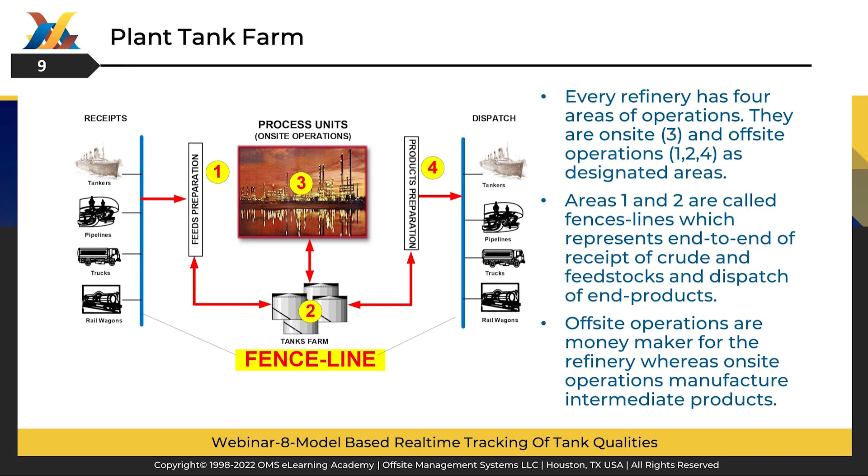The off-site areas are particularly significant commercially. They are the refinery's profit generators, managing the saleable end products. These off-site operations sharply contrast with the on-site processes, which focus on transforming crude into intermediate products. Understanding the dynamics of these areas helps us appreciate the refinery's workflow and the importance of real-time tracking of tank qualities, which ensures efficiency and profitability in this complex operation. Quality analysis is pivotal in refinery operations and can be conducted through various modes and methods.

Three primary methods are employed to measure or estimate product qualities within a refinery. Firstly, we have laboratory sampling, which remains the cornerstone of quality analysis. Lab analyses serve as a crucial backup and provide certification for all sample points, ensuring reliability in the measurement process.

Secondly, there's online measurement. Although not all streams are equipped with online analyzers, they provide a continuous and real-time assessment of product quality for those who are. Lastly, we resort to model-based predictions when online measurement is not available. This method uses computational models or inferential techniques to estimate the quality of the streams.

The slide clearly shows which methods are currently practiced and which are optionally practiced across different refinery areas, such as the fence line, the tank farm, and the process units. These methods form a comprehensive approach to managing quality, each with its role in ensuring the final products meet the set standards and specifications. Understanding and implementing these methods efficiently is critical to the success of any refinery operation.

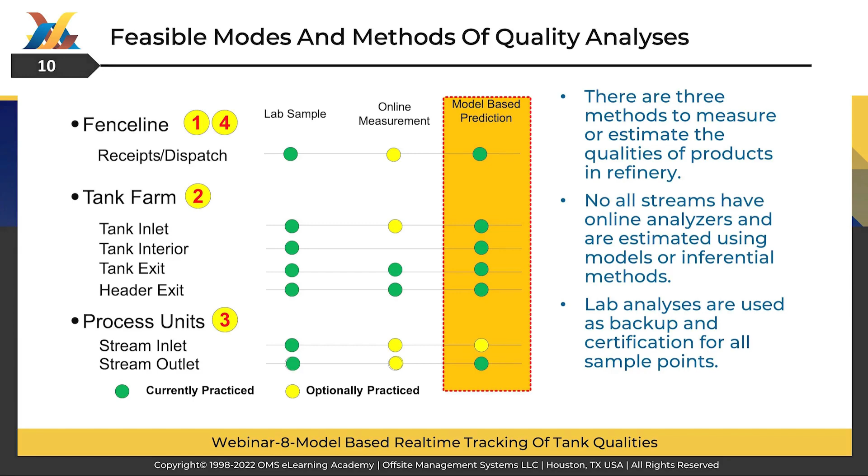In today's discussion on refinery operations, we highlight three crucial tank information types required for optimal management and compliance: inventory, quality, and fugitive emission. Modern refineries leverage automated tank gauging systems for inventory to keep a real-time tab on their liquid assets. This technology is crucial in monitoring the transfer of materials between plants, managing crude and product blending, and handling custody transfers with precision.

Regarding quality, we are looking at a robust certification process for product qualities before dispatch, thorough checks of feedstocks, and continuous control of process stream quality. This is further reinforced by comparing the readings from online analyzers to ensure consistency and accuracy.

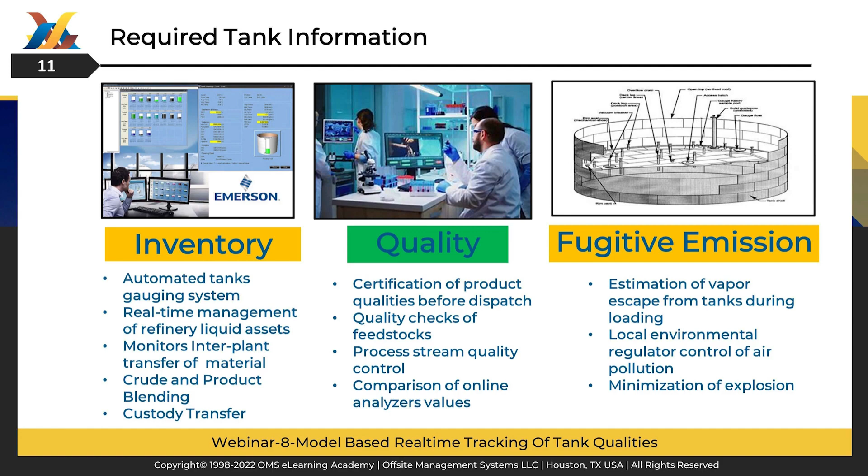Lastly, we focus on fugitive emissions, an environmental and safety concern. Refineries can better adhere to local environmental regulations controlling air pollution and significantly minimize the risk of explosions by estimating vapors that escape from tanks during loading. Together, these components of tank information form a trifecta of refinery efficiency and safety, ensuring that operations meet industry standards and contribute to sustainable and responsible production.

Now, let us dive into the sophisticated methodologies deployed for analyzing and estimating tank qualities within the refinery sector. First up, we have process analyzers. These are specialized devices, ranging from single-purpose analyzers for one specific analysis to integrated systems capable of multiple analyses, like near-infrared, NIR, or nuclear magnetic resonance, NMR, technologies. Some refineries utilize a combination of discrete and integrated analyzers or advanced multiplex systems that can manage multiple components and analyses simultaneously.

Next, we look at lab analysis. This traditional and rigorous approach involves a structured sampling and analysis schedule, with process streams sampled more frequently than tanks. To ensure the accuracy of online analyzers, samples are also taken to the lab. Furthermore, refineries often participate in round-robin tests to certify their lab values, maintaining the highest quality verification standards.

Lastly, model prediction plays a vital role. This prediction approach harnesses blend and inferential models' power to estimate tank and process stream qualities. It necessitates using multiplexed analyzers at tank inlets, allowing for a real-time model of tank qualities marrying historical data with new inputs to predict quality metrics accurately.

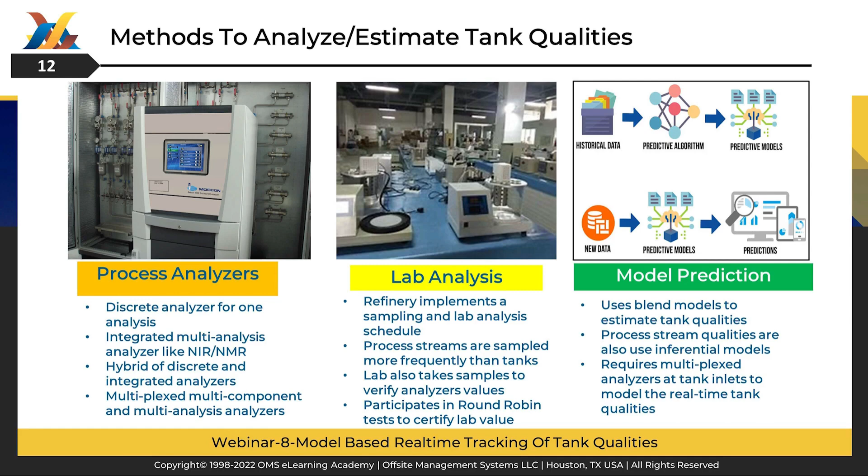These three methods represent the cutting edge in ensuring that the quality of the products stored in tanks is consistently monitored and maintained, reflecting the refinery's commitment to precision, safety, and quality control.

In the meticulous field of quality assurance within refineries, we employ a multi-tiered system of checks and balances to mitigate errors and biases. Starting with process analyzers, these sophisticated equipment pieces are not immune to analyzer error bias, necessitating regular calibration and cross-verification to ensure precision.

Lab analysis stands as the bedrock of quality verification. Despite its rigor, it, too, faces the possibility of human error. To counter this, we have stringent cross-checks and protocols, including participation in round-robin testing, a system-wide comparison exercise to ensure consistency and accuracy among various laboratories.

Model prediction, utilizing historical and predictive data, also brings in its challenges with model error bias. Continuous refinement of models with new data is essential to keep this in check. These methods converge to form a robust network of error checking, with each method validating the others, ensuring that the data on tank qualities is dependable and validated across multiple platforms, thus maintaining the highest quality control standards.

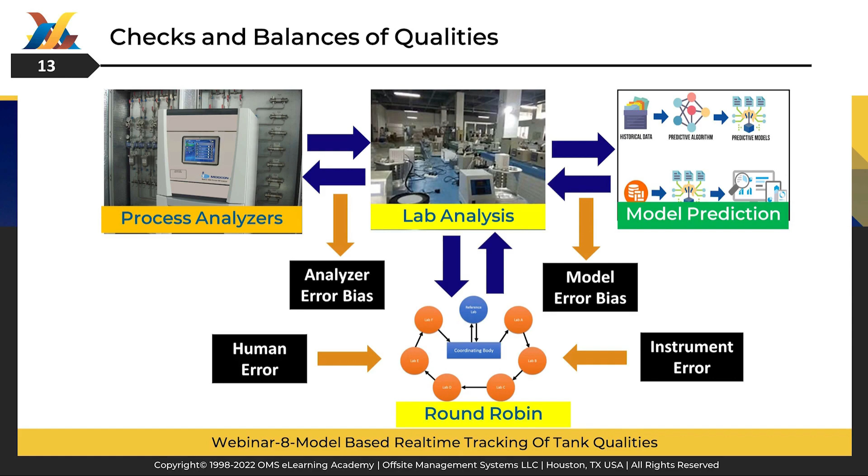Let us delve into Method 1 for tracking tank qualities, crucial to maintaining high standards in refinery operations. First off, we have the online analyzers. These are critical tools positioned at strategic points such as the tank inlet or outlet, monitoring the quality of the streams in real time. This continuous analysis allows for immediate adjustments and ensures consistent product standards.

The second layer of quality control comes from tank sample and lab analysis. Samples are regularly extracted from the tanks and analyzed in the lab to verify the online analyzer's readings. This dual approach reinforces the accuracy of the data we rely on.

Finally, we integrate model-based predictive calculations. These sophisticated algorithms consider historical data, current measurements, and predictive analytics to estimate future tank qualities. This provides foresight and enables initiative-taking decision-making to maintain quality standards.

By combining these three methods, we establish a robust, multifaceted approach to quality assurance that is both responsive and predictive, ensuring that our products meet the highest quality benchmarks before they reach the market.

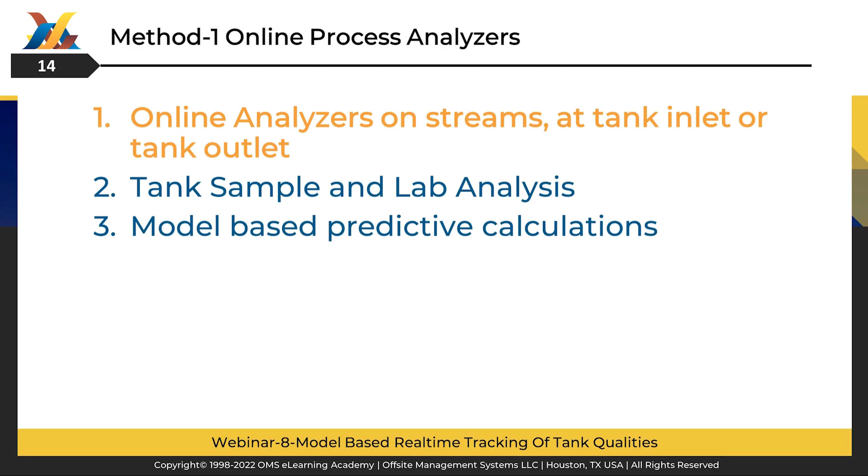In the high-stakes process control and quality assurance environment, online process analyzers are the unsung heroes. Here is how they fit into the workflow. Firstly, we place these analyzers right on the process unit output streams. Their job: to measure the stream qualities meticulously, ensuring each product meets our stringent standards before it moves down the line.

Secondly, we can deploy additional analyzers at the tank inlet. This step is not always used, but when it is, it provides an extra layer of quality control by measuring the qualities of the materials right as they enter the tank, keeping a vigilant eye on the process downstream from the process units.

And thirdly, these analyzers also play a critical role in the tank outlet streams. They are our final checkpoint, ensuring that the qualities of the materials as they leave the tank are up to par. With these online process analyzers at strategic points, we are not just tracking quality, we are defining it in real time, ensuring every product that leaves our facility does so with a stamp of excellence.

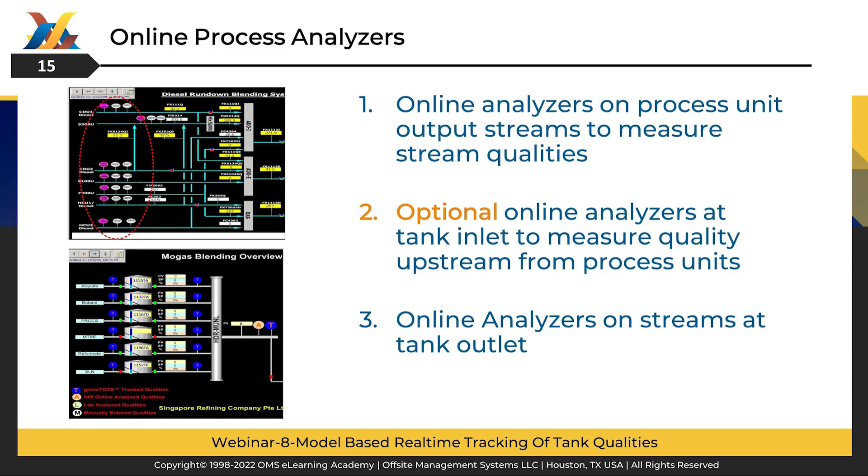In our ongoing discussion on refining operations, let us focus on the role of online and lab analysis in monitoring the rundowns from process units. Online analyzers are installed at process units to provide immediate insight into the qualities of the rundown streams. However, it is critical to understand that these readings reflect the state of the product at that moment and location and not necessarily the quality at the destination header or the storage tank.

These analyzers also cannot cover all bases. They do not analyze every quality aspect of a stream, so lab analysis comes into play to cover the full spectrum of required quality checks. Another interesting point to consider: these online analyzers are not always exclusive to a single stream. They may serve multiple streams, thus providing a shared service that is both efficient and practical.

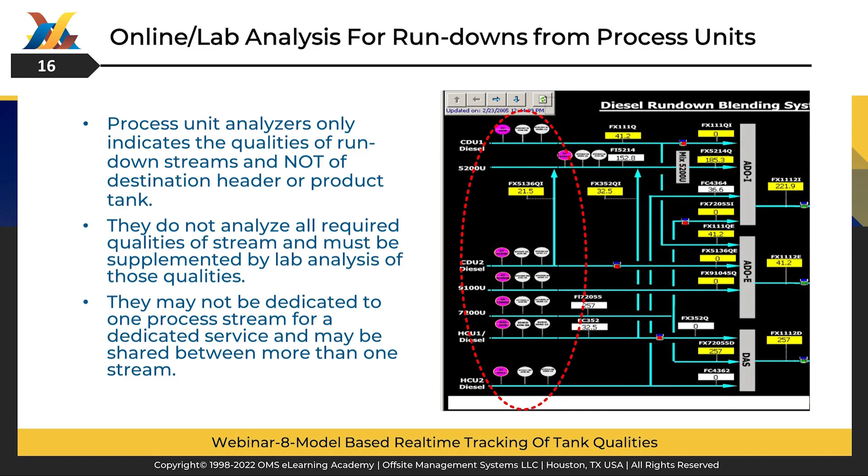These online and lab analyses provide a comprehensive picture of product quality as it moves from the process units to the destination, ensuring we maintain the highest quality standards at every stage.

The world of refinery operations heavily relies on the precision of online blending analyzers. Positioned at the critical junctures where components leave their tanks or at the blending header, these analyzers are the gatekeepers of quality during the blending process. They can be specialized for tasks or multifunctional, providing a dynamic assessment of various product streams.

These analyzers spring to life when the blending process is active. During these periods, they meticulously measure the qualities of the mix. Without active blending, they remain dormant, conserving their capabilities for when the process recommences. However, it is essential to note that even these advanced tools do not extend their reach to measuring the final product qualities in the tank.

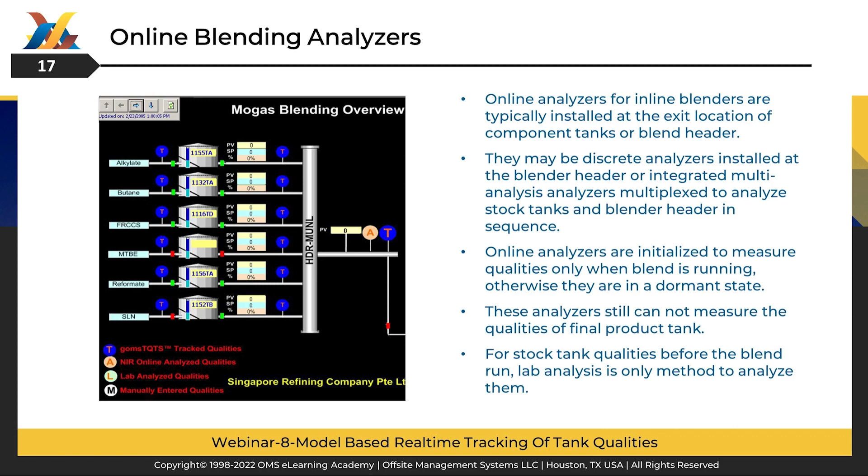For that, and for assessing tank qualities before the blending starts, lab analysis remains the cornerstone, providing the necessary depth and detail to ensure product integrity. Online blending analyzers offer a snapshot of the blending operation, part of a larger picture that ensures the quality of the product through a combination of sophisticated online tools and thorough laboratory work.

In our exploration of gasoline blending, we turn to the critical role of conventional online analyzers. These systems are not one-size-fits-all. Different analyzers are used for different quality aspects. For instance, near-infrared (NIR) analyzers handle a variety of quality measures but are not used for sulfur content, which requires a specific type of analyzer.

These online analyzers operate in a multiplexed fashion. What does that mean? It means they can cycle through multiple streams, assessing each to give a comprehensive overview of the qualities within the blending process.

This setup feeds into an advanced blend control and optimization system, which relies on the analyzed qualities to make real-time predictions and adjustments, ensuring the final blended product meets the exact specifications required. This intricate dance of technology is vital to how modern refineries maintain consistent product quality at every stage.

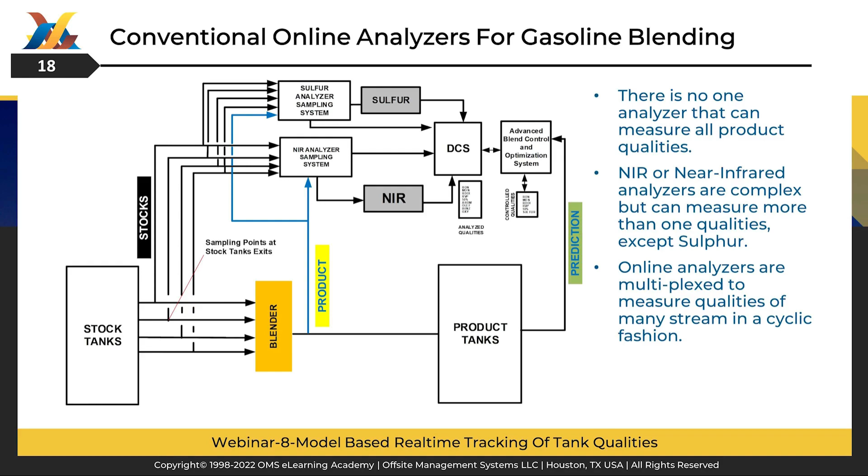This slide presents the varied features of online process analyzers in refinery operations. Online process analyzers are the technological eyes within a refinery stationed at the exit points of process unit streams. This strategic placement allows them to capture real-time data essential to control unit operations.

They are not just limited to monitoring the egress of streams but can also be found at the ingress points, such as the inlet to a storage tank, providing a versatile range of monitoring points. In the specific context of gasoline inline blending, these analyzers are indispensable. They are placed at the exits of tanks where they scrutinize the quality of products at this crucial juncture of production. Further versatility is noted in their installation at blend header inlets, which allows for a preemptive assessment of the qualities that will eventually define the final product.

The design of these analyzers varies. They can be either discrete, handling a single quality measurement for one stream, or integrated, capable of analyzing multiple qualities in one go. Additionally, some are multiplexed, meaning they can alternate their attention between different streams, enhancing their utility and efficiency within the plant operations. Through these features, online process analyzers provide a comprehensive and dynamic picture of product qualities across the refinery, which is crucial for ensuring top-notch product standards.

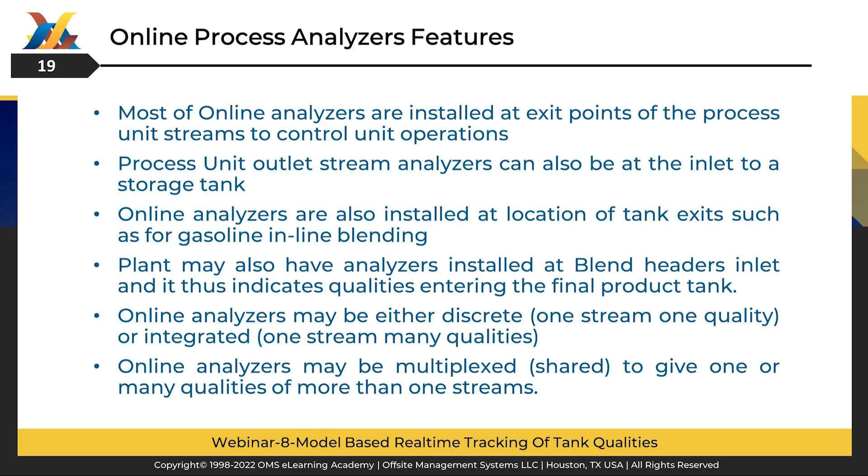This slide outlines a lab schedule that is instrumental for on-site refinery operations. In a laboratory setting within the refinery, every product and process stream from naphtha to visbreaker diesel has a dedicated schedule for sampling and analysis. This meticulous planning allows for precisely tracking the number of analyses required daily, weekly, and annually for each product. Such a detailed schedule is more than a mere timetable. It is a strategic framework designed to forecast laboratory operations workload and financial impact on the refinery.

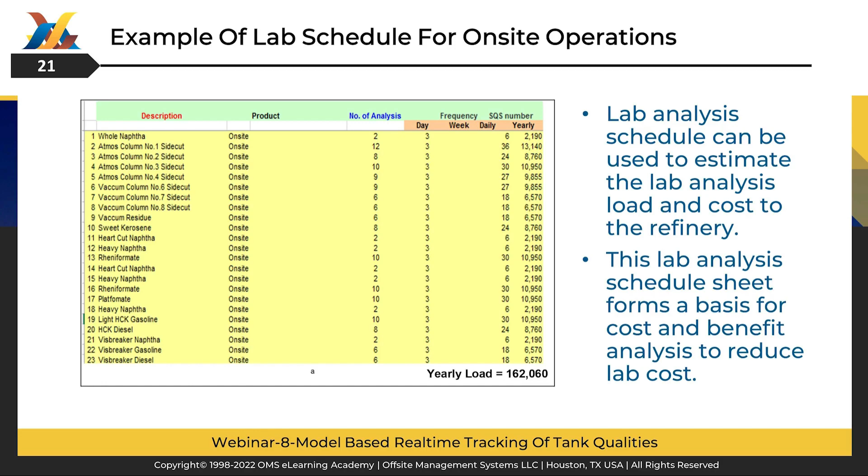The cost of lab analysis is not arbitrary. It is determined by a precise formula: the number of source points sampled, the number of qualities analyzed per sample, and the number of samples taken per period. This analysis is neatly summed up as SSQ, a multiplying factor of these three variables. When considering the SSQ value, you look at the required lab work volume. A higher SSQ signifies a more significant laboratory workload and thus, a higher expense to the plant.

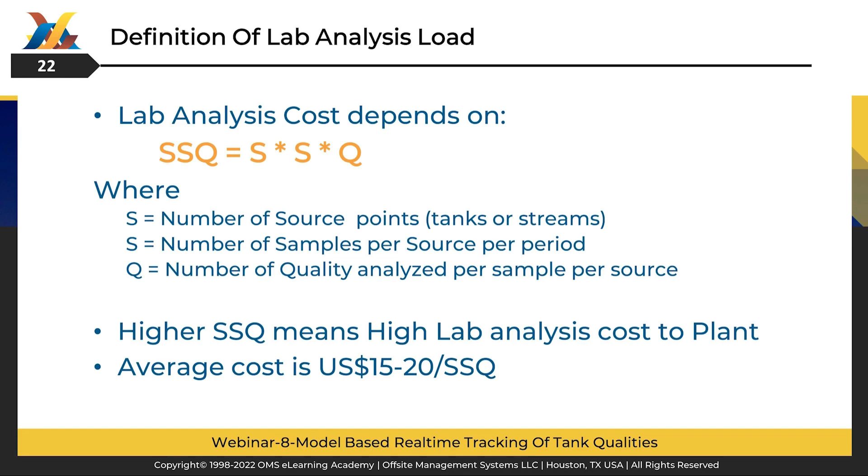To give you a perspective on costs, each SSQ typically costs about $15 to $20. This formula is not just a tool for accounting, it is a strategic asset that can be used for planning and optimizing lab operations to manage costs effectively while ensuring quality.

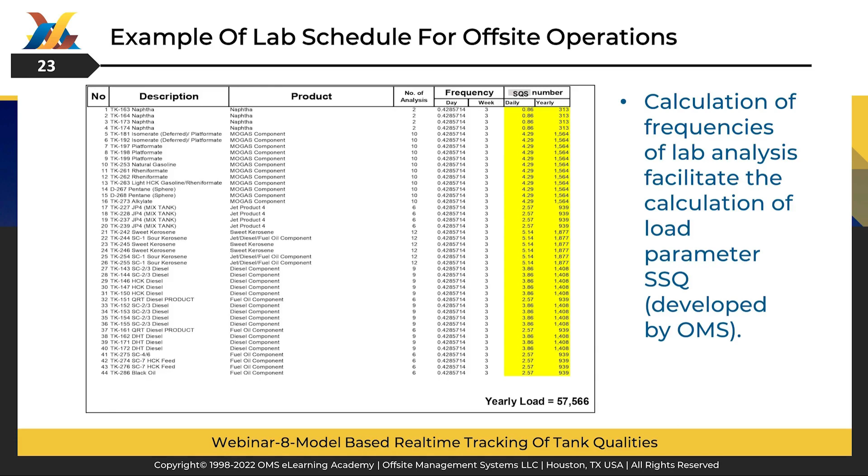Here is a breakdown of the SSQ, or source sample quality, across different refinery operations. This statistical approach, known as frequency distribution, highlights how often specific sample quality sequences occur. The table divides the data into three key segments: on-site, off-site, and overall refinery operations. By categorizing the SSQ values into bins, the refinery can quickly assess the distribution and frequency of sample analyses conducted. For instance, in off-site operations, the frequency with which specific SSQ values occur can vary significantly, with some sequences being much more common than others.

This frequency distribution is vital for refining lab scheduling, workload estimation, and cost management. Overall, understanding this distribution aids the refinery in optimizing its sampling processes and aligning its lab activities with the operational demands, ensuring an efficient and cost-effective approach to maintaining product quality.

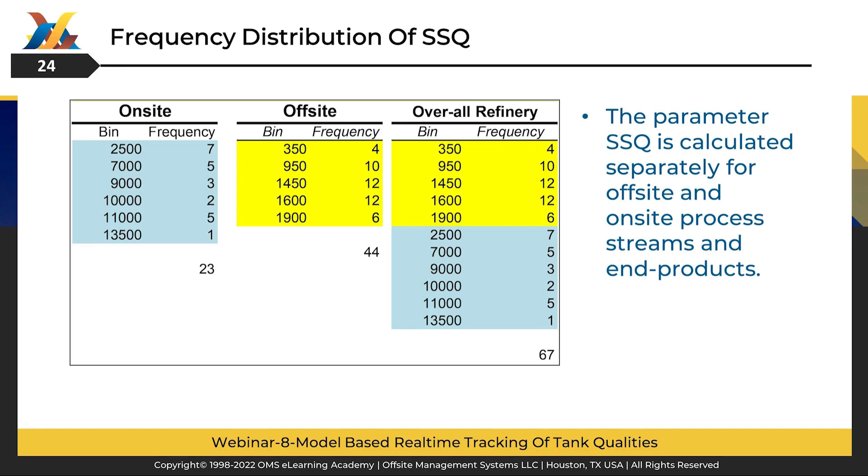This slide visually depicts the sample quality sequence, SSQ, workload across on-site and off-site refinery operations. The bar graph eloquently illustrates the frequency of lab analysis required per year at various SSQ intervals. This visual aid underscores a distinct contrast. On-site operations have a higher frequency of lab analyses, necessitating more frequent sampling, daily, in fact, to maintain stringent quality control. Off-site operations, while requiring a substantial number of samples, typically undergo weekly lab analyses.

The takeaway is the SSQ parameter's capacity to offer a snapshot of the operational intensity. With this graphical representation, refinery managers can instantly gauge the lab workload and allocate resources efficiently, ensuring that the balance between operational demands and lab capacity is maintained optimally. This balance is crucial for sustained quality assurance in refinery production.

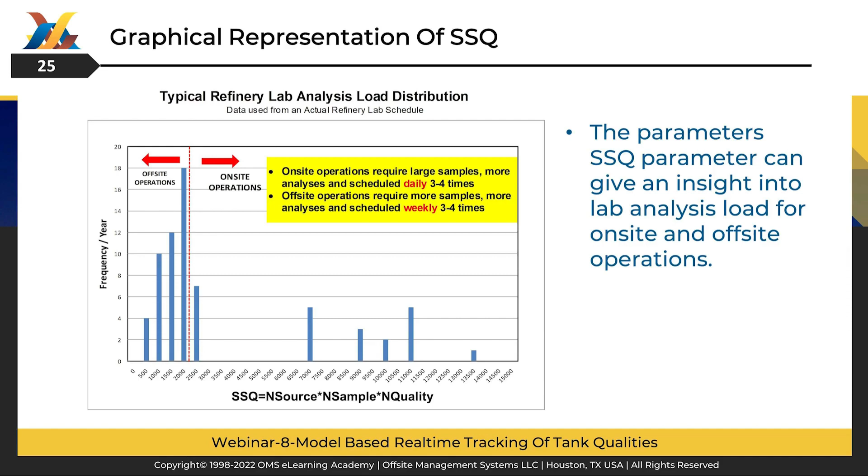Let us delve into the fiscal specifics of refinery lab analysis, presenting a detailed cost breakdown for on-site and off-site operations. This slide encapsulates the financial anatomy of lab work, offering a quantitative lens through which to view operational expenditures. It breaks down costs associated with the workforce for sampling and analysis and the overall yearly SSQ load, a key figure that echoes the volume of lab activity. In terms of expenditure, it is interesting to see how the total costs are distributed between sample collection and the lab analysis itself, underscoring the substantial investment a refinery makes to ensure product quality.

Furthermore, the slide indicates that these costs can be honed to a near-precise estimate within a margin of plus or minus 10%. It is not set in stone. The flexibility is there to adjust local workforce costs, allowing refineries to fine-tune their budgeting with the real-time economic landscape. This cost analysis is more than a budget sheet. It is a strategic tool, empowering refinery management to allocate resources wisely and sustain their commitment to quality in the most cost-effective manner possible.

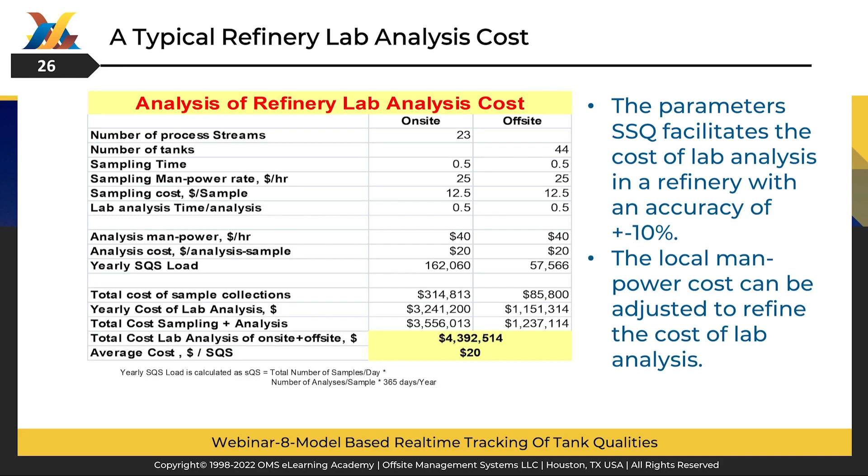This equation allows refinery managers to dissect the total observed bias and pinpoint the root causes, ranging from the equipment used to the methodologies applied. It is a diagnostic tool that aids in refining the quality control process, ensuring that every factor is accounted for and that the quality of the product in the tanks is precisely monitored and maintained. Understanding and managing these biases is crucial to achieving the accuracy required for high-quality refinery outputs.

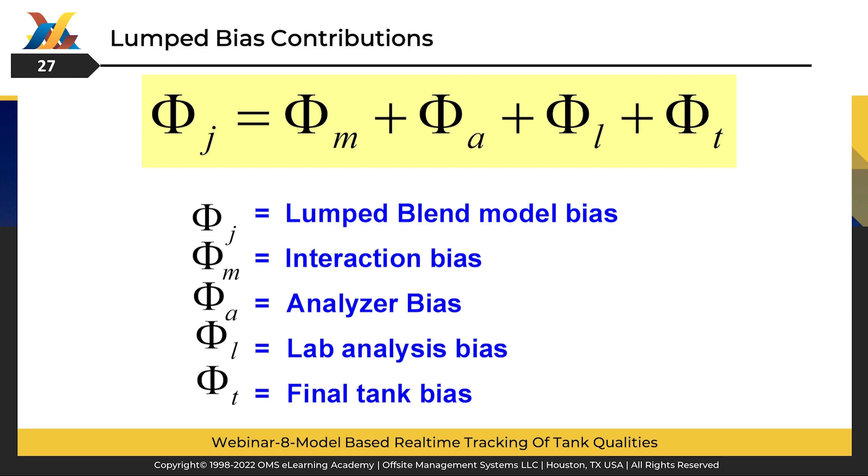Let us now discuss the process of estimating biases that can occur at different stages of tank quality analysis in a refinery setting. The flow chart begins with streamed samples that feed into lab analysis, where the potential for bias, phi-l, is accounted for, informed by results from periodic round-robin tests. These tests ensure lab measurements are as close to the actual value as possible. Simultaneously, online analyzers monitor the stream, subject to their own bias, phi-A. These biases are inherent to the devices and must be considered when interpreting their data.

Then, we have the predicted blend header quality. This estimate includes its own model bias, phi-M, which arises from the predictive models used to forecast the qualities of the blend. Lastly, the final blend tank prediction carries a final bias, phi-T. This bias can stem from multiple sources and affects the final predicted quality of the product in the tank.

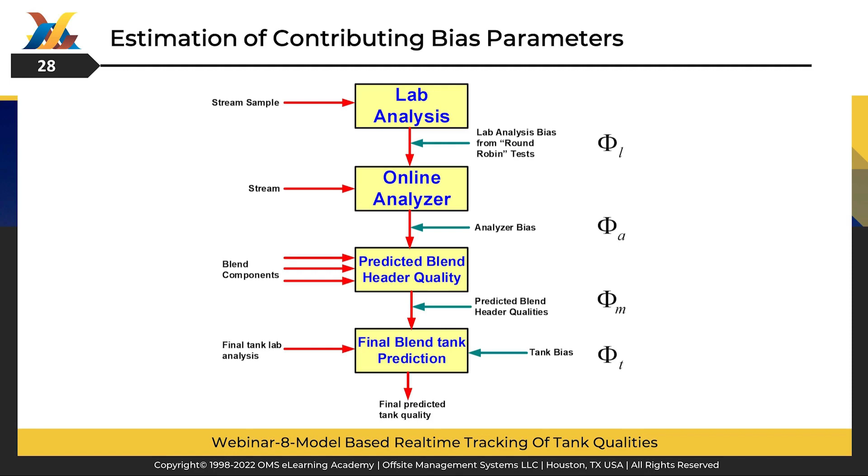Altogether, this estimation process is critical for identifying and minimizing biases throughout the refinery's operations, enhancing the accuracy of quality tracking, and ensuring the final product meets the desired specifications. Understanding and managing these biases ensures the quality control process is as precise and reliable as possible.

Have you heard of round robin? It is a collaborative effort of multiple laboratories in a proficiency testing exercise known as round robin testing. This process is designed to enhance the accuracy and reliability of lab analyses across the industry. Here is how it works. A sample is first analyzed by a reference lab, which sets the standard for comparison.

It is then passed along to the next lab in sequence, Lab A, initiating a cycle where each lab, in turn, assesses the same sample and sends its results to a central coordinating body. As the sample travels from lab to lab, each using potentially different instruments and methods, the coordinating body gathers the data. A comprehensive analysis is conducted once the cycle is complete and the sample returns to the coordinating body from the last lab.

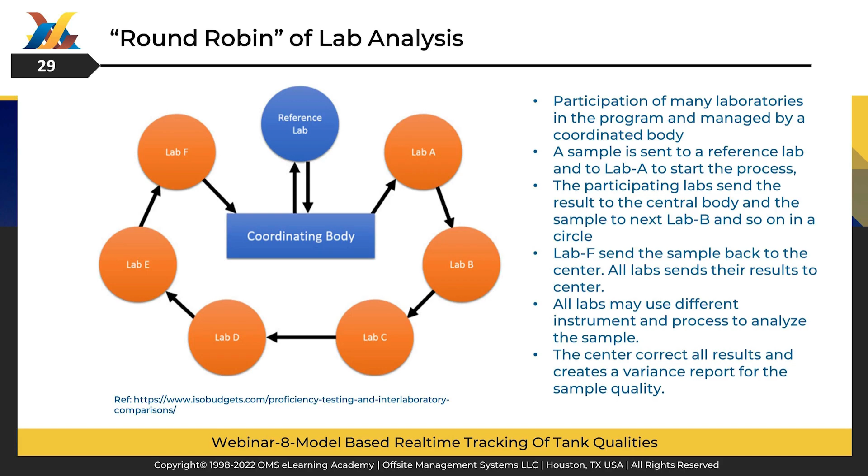The final step is crucial. The coordinating body evaluates all results, adjusts for discrepancies, and generates a variance report. This report is critical to identifying deviations and helps all participating labs calibrate their methods and instruments, ensuring consistency and precision in future lab analyses. The round-robin exercise, therefore, is a testament to the collaborative efforts to uphold quality and accuracy in lab operations within the industry.

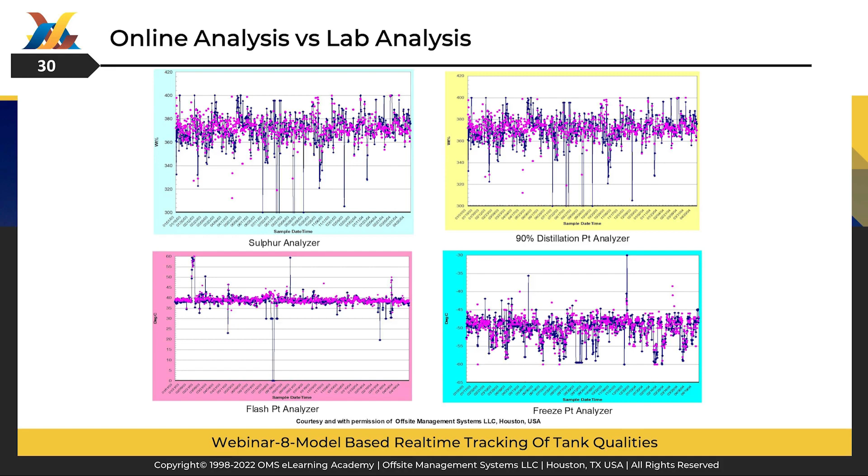These graphs highlight the variances, if any, between the two methods and provide a clear picture of their correlation and consistency. This graphical data can be a foundation for calibrating online analyzers and improving lab techniques, leading to more reliable and accurate product quality assessments. It is a compelling demonstration of how data visualization can fine-tune the intricate dance between various testing methodologies in a refinery context.

Now, we focus on the critical role and features of tank samples and lab analysis within the refinery's operations. The schedule for taking these samples is meticulously predetermined, hinging on how crucial the tank quality data is for the refinery's workflow and for meeting the customer specifications. The information gained from these samples is essential. Not only does it form the basis for certifying the tank for final product sale, but it is also instrumental in planning how to blend various products like gasoline, diesel, or other fuels. Moreover, understanding the input feed qualities is necessary for the optimal operation of process units.

However, there is a catch: results from these analyses are not instantaneous. They can take 4 to 24 hours to get to the teams that need them. And, if the tank is actively in use, the data may become outdated quickly, adding a layer of complexity to the refinery's decision-making process. While lab analyses are a cornerstone of product certification and quality assurance, refineries must navigate the time-sensitive nature of these results and their potential to become outdated in a dynamic production environment.

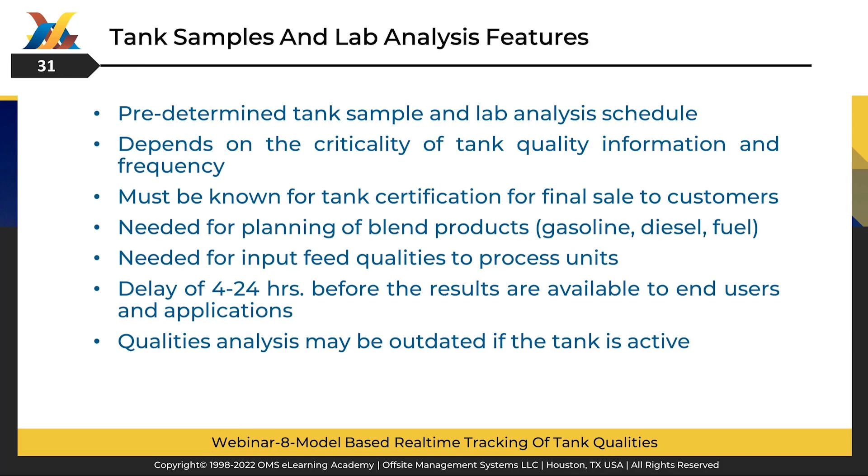Here is an outline of a 3-tiered approach for analyzing refinery tank qualities, incorporating the latest methodologies in data-driven decision-making. The first layer involves using online analyzers at critical junctures such as tank outlets or upstream process units. These sophisticated devices immediately read the product's qualities, providing crucial real-time data. Next, we have the tank sample and lab analysis phase. This step adds depth and verification to the data gathered by the online analyzers. It is about getting hands-on with the product and ensuring all quality parameters are met through rigorous testing.

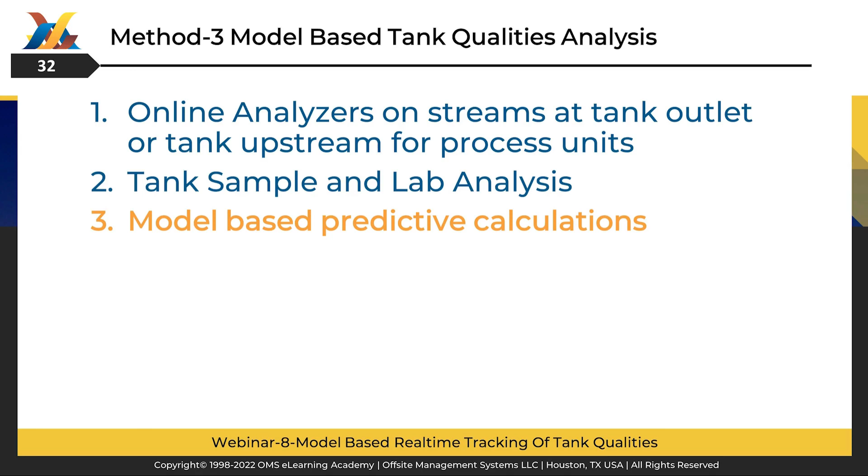And finally, we bring in model-based predictive calculations. This method is where we take all the gathered data and apply advanced algorithms to predict future qualities. It is a forward-looking approach that helps anticipate and solve quality issues before they arise. Together, this trio of techniques ensures that quality control is not just about responding to current conditions but proactively managing the future, ensuring consistent product quality in the dynamic environment of a refinery.

This slide illustrates the sophistication of model-based systems in monitoring and predicting tank qualities in refineries. This system is like the refinery's central nervous system, continuously analyzing and providing crucial quality data on the components and the final product tanks. The system can deliver near-instantaneous quality readings by integrating real-time tracking and advanced predictive algorithms.

This technology does not operate in isolation. It communicates seamlessly with every part of the refinery operation, from the upstream process units to the downstream planners and even the online blending systems. This strategy ensures that every decision made, whether for blending or distribution, is informed by the most current and accurate

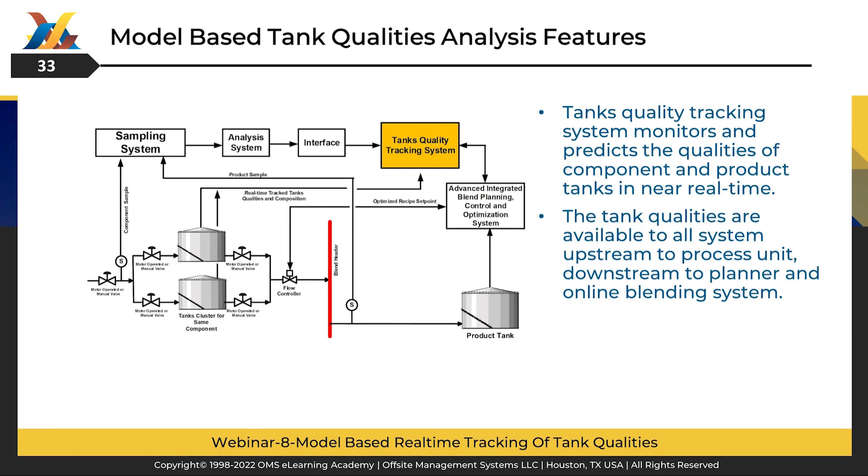The return on investment, ROI, period is just 1.6 months. That is incredibly fast and a clear indicator of how swiftly the investment pays off. This level of cost efficiency underscores the strategic value of model-based systems. Refineries can achieve a leaner, more economically sound operation by optimizing processes and reducing labor and resource expenditure.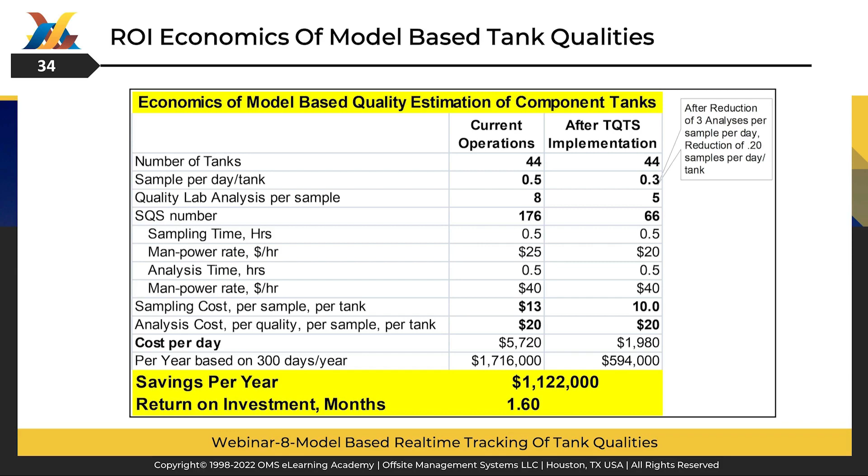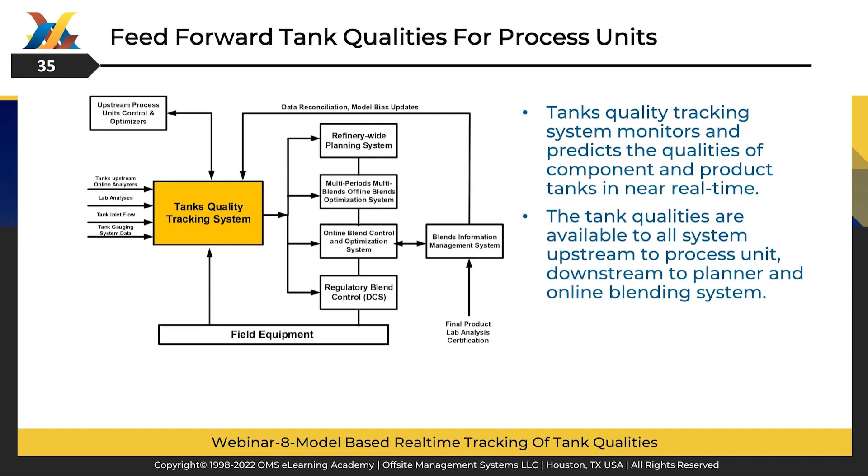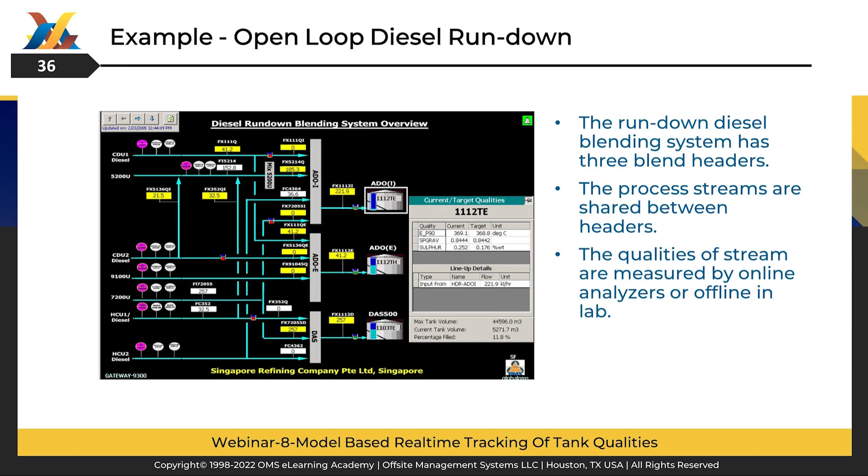Quality control is critical in this process, and it is managed through a combination of online analyzers and offline lab analysis, ensuring that the diesel meets the necessary specifications for each blend. The online analyzers provide a continuous data stream, allowing for real-time adjustments. At the same time, the lab analysis offers deeper scrutiny to verify the product's quality before it is sent to the market. This slide encapsulates the detailed attention to quality and the use of advanced technology, ensuring that the final diesel product is consistent and meets the high standards expected by customers and regulators.

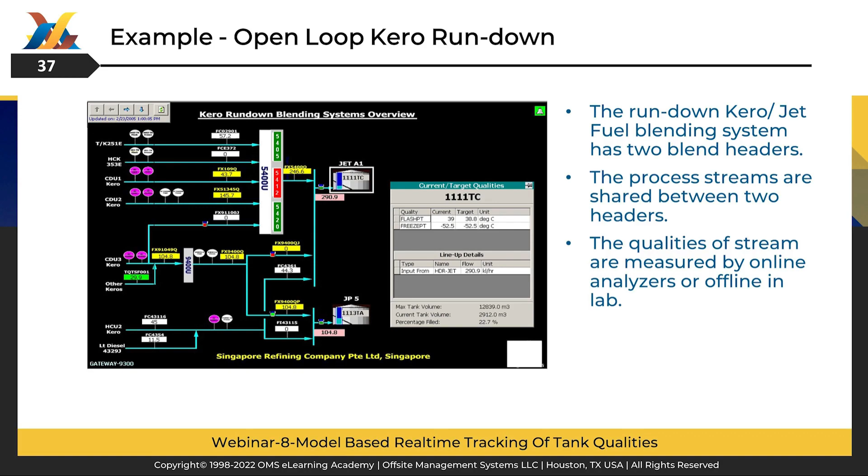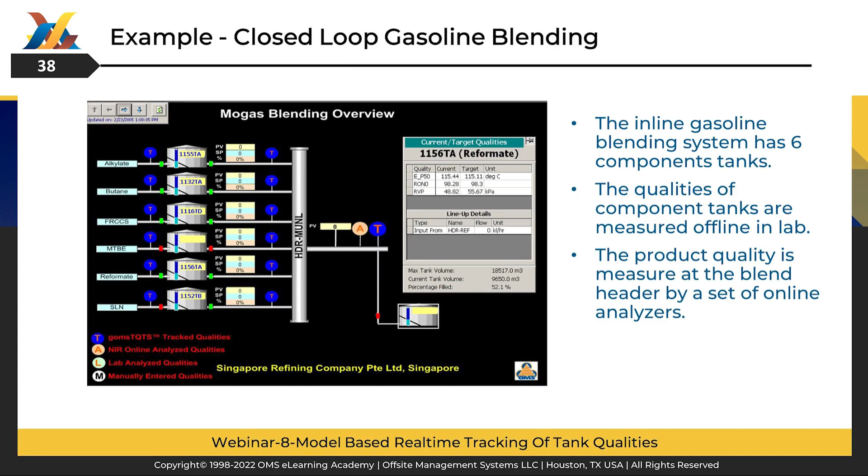This blending overview illustrates the technology and infrastructure in place and the refinery's commitment to precision and control. It captures the essence of modern refining, a balance of scientific analysis and real-time data processing, ensuring every drop of gasoline meets the set standards for quality and consistency. This system reflects a stride toward operational excellence, where technology bridges the gap between quality control and efficiency.

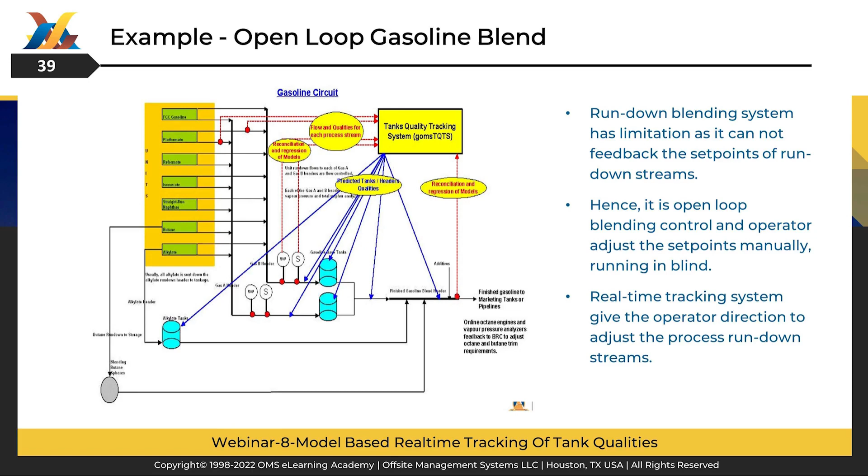However, this is where the ingenuity of the real-time tank quality tracking system, gomsTQTS, shines through. It serves as the compass for operators, providing crucial directional cues to fine-tune the process streams effectively. This method ensures that the most current and accurate data guides the blending process despite the open-loop system's inherent restrictions. This step leads to optimized blend qualities and a superior product reaching the market.

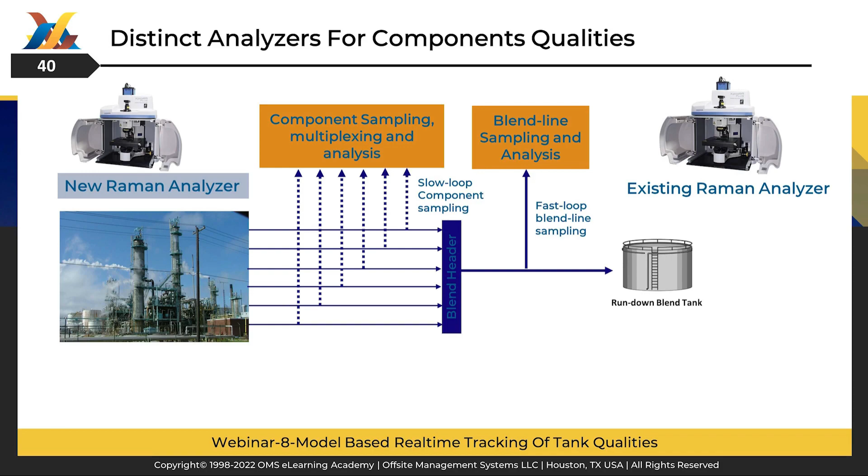It is like having a meticulous scientist and a quick-thinking strategist working to ensure that the rundown blend tank's output meets stringent quality expectations. With such technology, refineries are not just equipped but empowered to maintain the highest standards in product quality, thereby assuring customer satisfaction and regulatory compliance.

It is a delicate balance between what is measured and predicted on the fly and the calculated corrections applied offline, ensuring that the final product is not just up to mark but consistent and reliable, time after time.

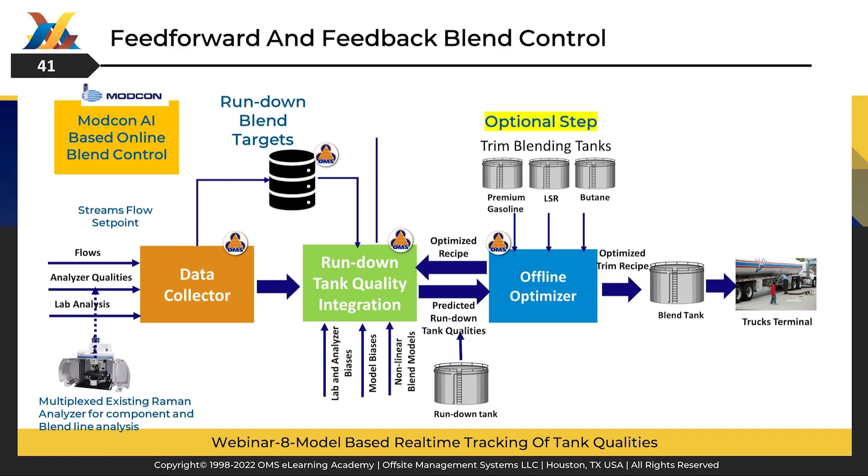Here is another example of naphtha blending operations. At the heart of this system is the blend of various naphtha feed tanks to achieve a final product with a uniform density, ensuring consistency and quality for the downstream processes. The layout depicted in the graphic illustrates a meticulous arrangement of feed lines, flow control elements, and storage facilities, all intricately designed to harmonize the flow and qualities of naphtha from different sources.

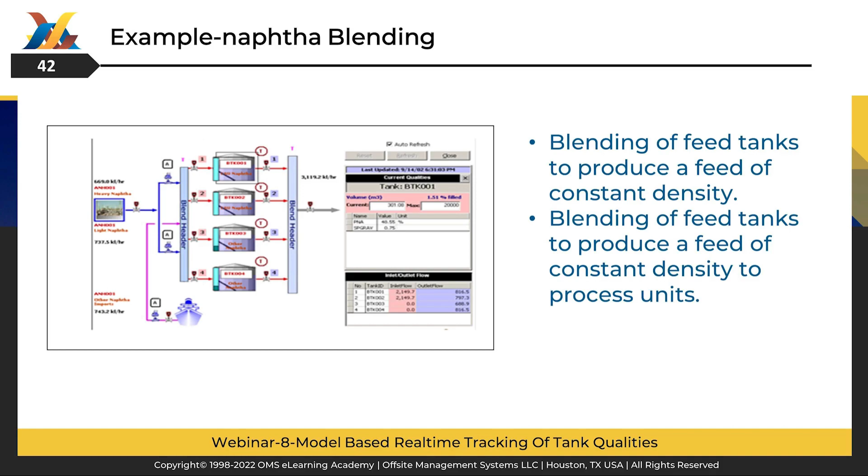It is a dance of precision, with operators and automated systems collaborating to maintain the delicate balance required for optimal naphtha quality. By closely monitoring and adjusting the blend, the facility ensures that the processed naphtha meets the rigorous standards for further refinement or direct application. This slide highlights the importance of precision in the blending process, where consistency is not just desired but essential for the integrity of the product and the efficiency of the entire refinery operation.

Here is an intricate web of the tank's quality tracking system developed by OMS. This sophisticated software casts a wide net across various modules and interfaces, integrating seamlessly with distributed databases and distributed control systems, DCS.

The system operates in a PC-based, multi-user environment that capitalizes on a server-client architecture, ensuring multiple users can access real-time data and insights concurrently. At its core, the system features a neural network that estimates stream properties, a blended information management system, and a dynamic library with quality models and optimizers.

It is designed to be customizable, sporting dedicated process data interfaces and displays, along with alarms, messaging, and reporting functionalities. The tank's quality tracking system exemplifies the constructive collaboration between technology and human oversight, providing a comprehensive toolkit for accurate monitoring and decision-making in tank quality management. It is a digital orchestra where every instrument plays a critical role, contributing to the harmony of operations and quality assurance in a modern refinery setting.

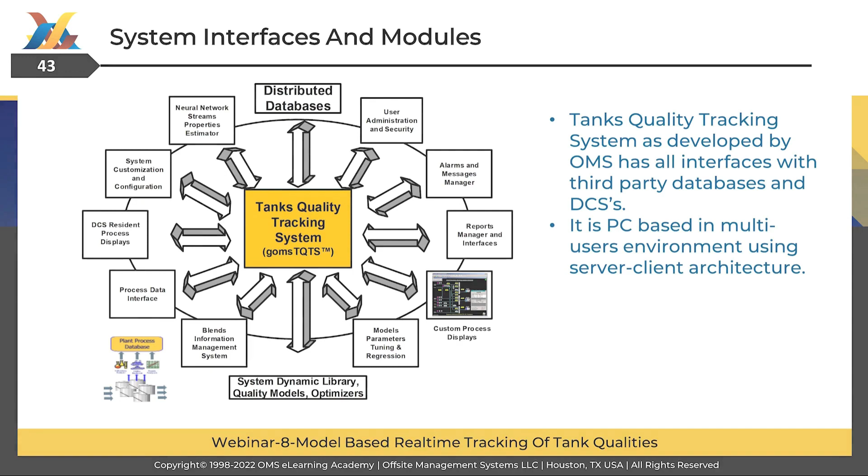This slide highlights the tank's quality tracking system's composition tracking feature. It is an analytical powerhouse that applies the principles of a CSTR, or constant stirred tank reactor, model to assume a well-mixed tank for accurate monitoring. The interface provides a clear, graphical representation of the current and historical tank composition, with the ability to track the segregation of individual components over time.

The system offers an in-depth view of the material balance with timestamps, displaying crucial information such as source, product, total volumes, and specific densities. By visualizing the components' distribution within the tank, operators can effectively manage and predict the quality of the output, ensuring that the process aligns with expected standards.

This real-time compositional data is vital for making informed decisions on the fly, optimizing blend operations, and maintaining consistent product quality. It is like having a microscopic view of the tank's molecular dance, allowing for precise adjustments and optimal control of the blending process.

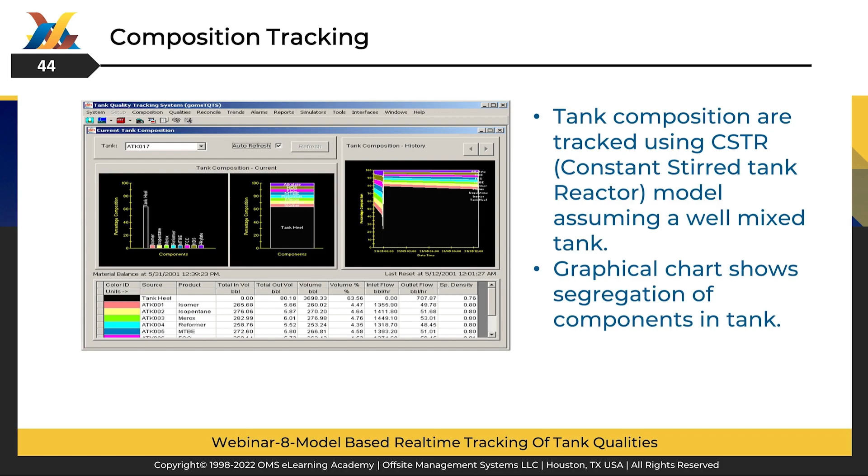This slide displays the multi-tank quality tracking display, a sophisticated tool for monitoring the quality of multiple tanks over time. It uses advanced nonlinear blend models to calculate and track the quality of contents in each tank. This tracking ensures that the blend quality meets the desired specifications. The display presents a series of historical charts that provide a visual history of various quality parameters like RVP, MON, RON, and distillation points, among others.

These charts are an essential part of the system, allowing operators to see trends and patterns in the data, which is crucial for making informed decisions about future blending operations. The user-friendly system interface offers options to select tanks, set time intervals for data display, and even print charts for reporting or analysis purposes. With this real-time tracking capability, refineries can optimize their blending processes, reduce waste, ensure consistency in product quality, and respond swiftly to any deviations from the set quality targets.

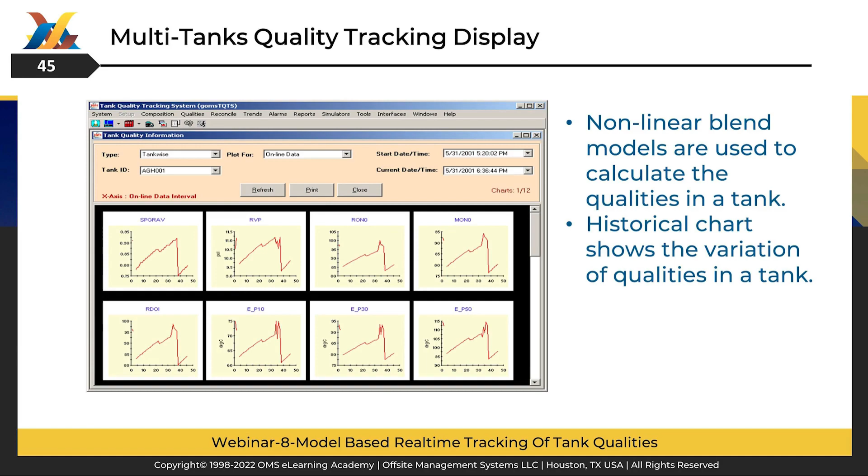This slide outlines the advanced capabilities of a model-based prediction system for managing fuel qualities, such as those in diesel, kerosene, and gasoline. This intelligent system can model over 70 qualities across various end products, ensuring a broad application scope. The system excels at real-time monitoring and adjusting, estimating quality changes due to various operational activities like inter-tank transfers, loading and unloading, rundown processes, and batch blending.

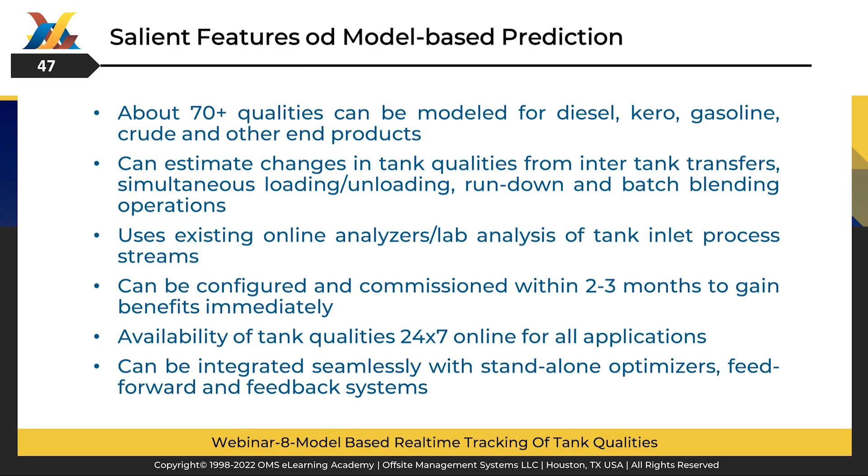It is designed to work harmoniously with standalone optimizers and complex feed-forward and feedback systems, highlighting its versatility in various operational environments. This slide presents a robust, flexible solution for quality tracking, promising to enhance operational efficiency and product reliability through its sophisticated predictive capabilities.

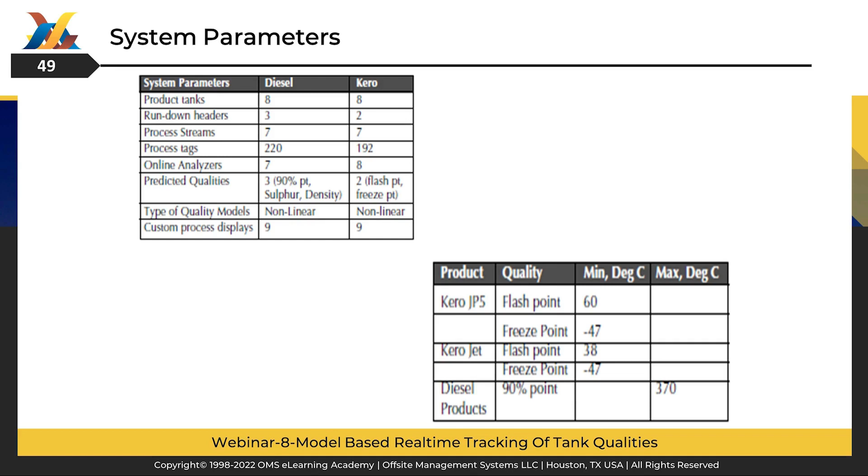Additionally, the slide shows quality parameters for different products, such as KERO JP5 and KERO Jet, with specified minimum and maximum thresholds for qualities like flash point and freeze point. This emphasizes the precision and safety standards in monitoring fuel quality. The slide indicates a well-equipped and finely tuned system that closely monitors and predicts the quality of diesel and kerosene products, ensuring they meet the necessary standards and specifications for their respective uses.

Let us look at a concise overview of key performance indicators, KPIs, for the quality tracking of kerosene and diesel products in a refinery setting. It showcases the effectiveness of the tank quality tracking system, gomsTQTS, by comparing quality deviations of products from their target specifications in 2001 and 2003.

The freeze point deviation for kerosene also saw a slight improvement in the average deviation, but more notably, the standard deviation reduced, reflecting a tighter quality control and less variability in the product.

In summary, the introduction of gomsTQTS has contributed positively to the refining process by reducing the average deviation from target specs and, in most cases, narrowing the variability, thus enhancing overall product quality consistency. This slide underscores the system's value in refining operations, emphasizing its impact on maintaining stringent quality standards for hydrocarbon products.

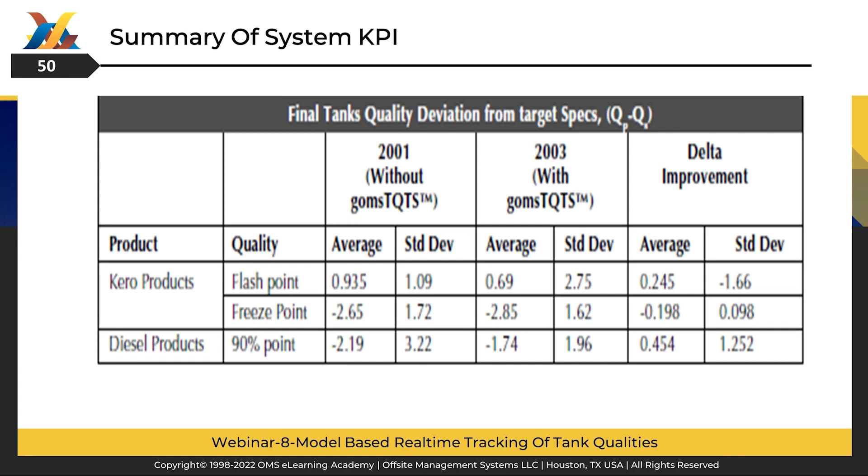The reduction in giveaways and off-spec conditions indicates a more efficient and precise system, minimizing waste and enhancing the overall reliability of product quality. The implementation of TQTS seems to have successfully reduced the quality deviation, bringing more samples within the acceptable range and enhancing the consistency of the diesel products. This improvement not only suggests a direct positive impact on operational efficiency but also highlights the value of TQTS in quality control and product consistency within the refining process.

This slide presents the positive outcomes of the tank's quality tracking system, TQTS, implemented by the Singapore Refining Company, SRC. The system, developed by Offsite Management Systems LLC, has been instrumental in optimizing SRC's blending operations for kero and diesel. The highlight is the financial gains the refinery has achieved through this system, estimating an impressive range of $2.5 to $4.4 million in annual tangible benefits.

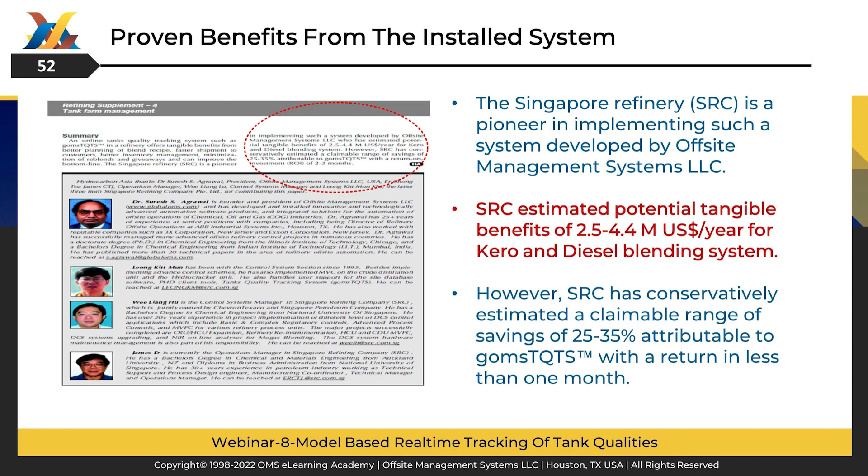SRC has taken a conservative stance in claiming savings, acknowledging that 25 to 35% of these benefits can be credited directly to the implementation of OMS's TQTS. This conservative estimate speaks to the system's efficacy, as the refinery has experienced a rapid return on investment, with payback in less than 1 month. This slide underscores the transformative impact of integrating advanced tracking systems into refinery operations, leading to significant cost savings, efficiency improvements, and a swift return on investment, solidifying the case for investing in such technologies.

To summarize this topic, emphasizing the advances in predictive technology for online measurement of tank qualities. This innovative approach has proved its value, showcasing its potential by providing round-the-clock monitoring of tank properties in both the refining and chemical industries. Notably, the technology is versatile, functioning efficiently in both open-loop and closed-loop systems and allowing for seamless integration. A significant enhancement is seen in the role of online analyzers. By optimizing their placement, the technology has increased their effectiveness, ensuring more accurate and timely data for operational decisions.

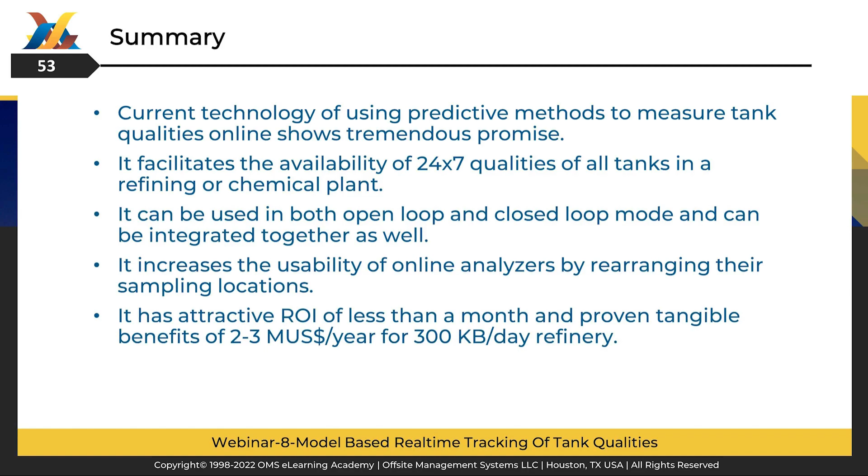This, in turn, has led to an impressive return on investment in under a month, with substantial financial benefits accruing annually for refineries processing 300,000 barrels per day. We conclude by highlighting this technology as not just a cost-saving measure but also a tool that brings about a paradigm shift in how tank quality control is perceived and managed within the industry.